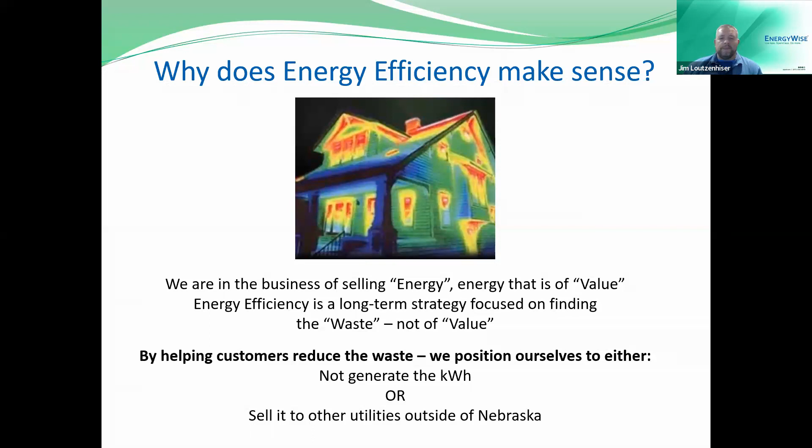In order to know how to be more energy efficient, or what energy efficiency improvements will make the most difference on your utility bill, we must first know where all the energy that you are using in your home is going. Let's look at the typical residential energy use in Nebraska.

You can see that the largest piece of the pie in the chart is heating, which is about 45% of your annual bill. This isn't so surprising since we live predominantly in a cold climate zone for most of the year. Yes, we do get very hot in the summer, and we do have extreme temperatures in the summer, but it's only for a short few months versus the winter, which seems to last forever if you're from Nebraska.

Next, you can see our air conditioning energy, or space cooling, is 9%. If you add both of these up, they total 54%. What that is saying is that about 50% of your annual bill is due to heating and cooling your home. If we can lower the energy used to heat and cool our house, then our bills will naturally be lower.

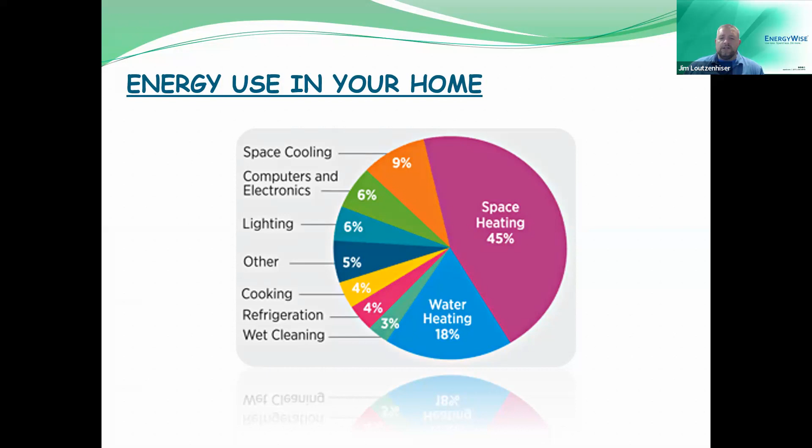Now that we can see where our energy is typically consumed in our house, we need to get to know what other factors can contribute to energy use in your home.

We get many calls complaining that their bills are so much higher than the neighbor's house, and that they have exactly the same style of home. Why is my bill higher than theirs, they ask. Our answer is generally, every home is uniquely designed and operated.

From the actual frame design, or the blueprint design, to the contractors who worked on building your home—many times one house will be built by this contractor, and then the other house is built by this other contractor, and they practice different things, and they actually do different ways of installing insulation, which can change the way that your house operates. Also, the different toys that we have in our home, such as hot tubs, steam rooms, gaming computers, and a lot more—each home's energy consumption is different.

We need to keep that in mind. And the one factor that most people don't consider is that the number of people in the home affects the energy use, and the way they practice energy efficiency can significantly affect the energy use as well. All these factor into your home's energy use and ultimately your monthly utility bill.

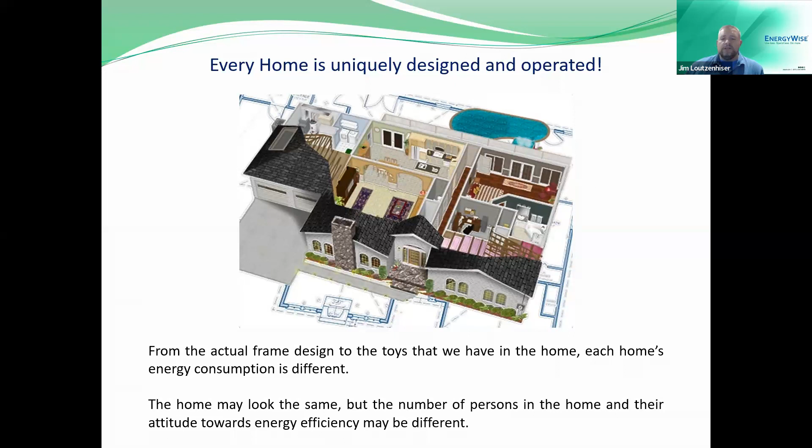All right, now that we know typical energy uses in a typical Nebraska house, and that every house and household is different, we are now going to review smart ways to save on utility bills. And you can see there... stuck here. Okay, here we go.

We are now going to review smart ways to save on utility bills. How best to do this other than the top 10 energy list that we're going to share here. Sorry, the preview came up before, so I got a little lost there. Anyway, back on task here.

Since the largest portion of the pie chart that we looked at before is heating and cooling your home at 50% of your annual bill, generally improving heating and cooling, or HVAC, in your home will be the greatest energy saver and the number one tip for you today.

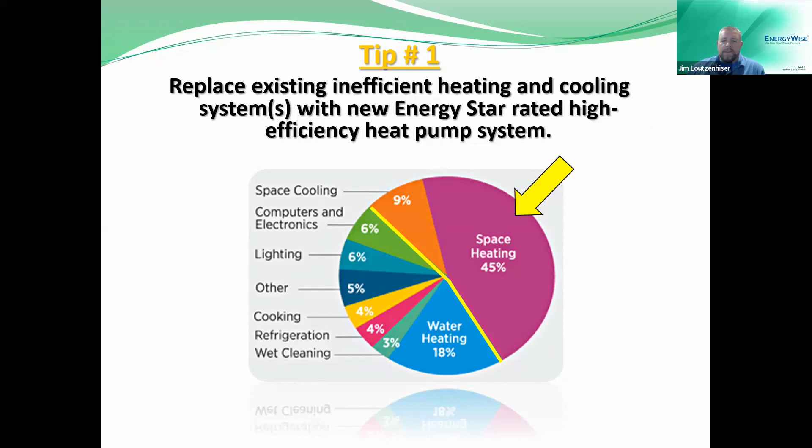So tip number one is replace existing inefficient heating and cooling systems with a new Energy Star rated high efficiency heat pump system. If your heating and cooling system is old, about 15 years and older, and considered to be inefficient, replacing it with a new high efficiency heat pump system makes sense. Let's quickly review how heat pumps save you money.

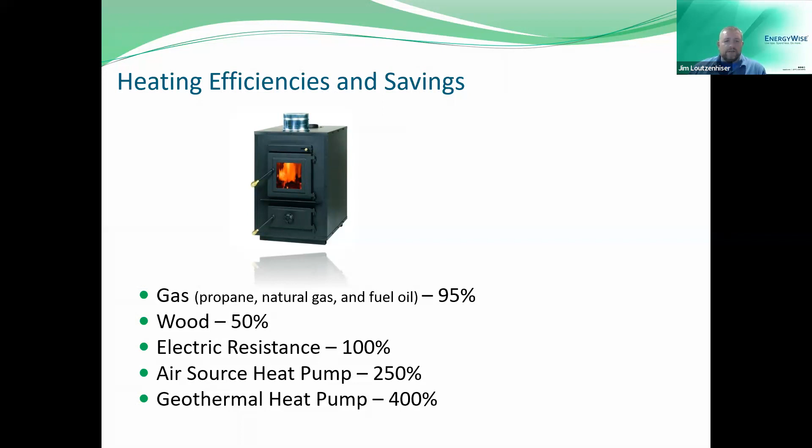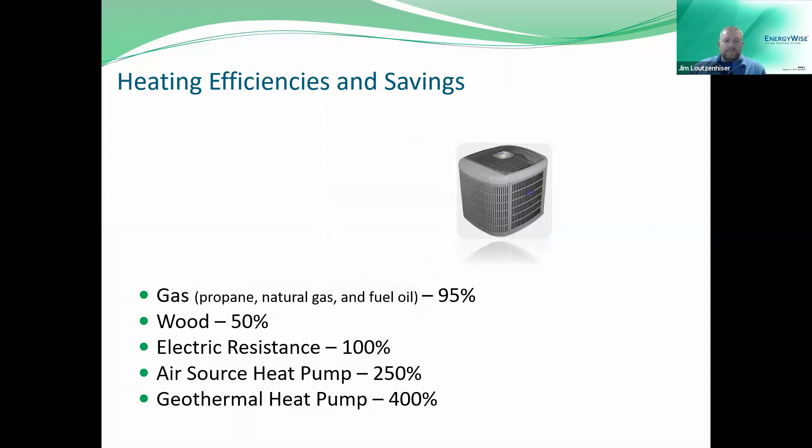In Nebraska, homes are typically heated with the following types of heating systems. The first is gas, usually propane, natural gas, or fuel oil, which is at best 95% efficient. Next is wood. Some people, especially in Nebraska, still like to go out and cut wood, but 50% of their energy goes to heat and the other 50% goes to waste. Next is electric resistance, which is 100% efficient. Then there's heat pump, at 250% efficiency, and last is geothermal heat pump, at 400% efficiency.

And most of you guys are thinking, wait a second, only in football can you go over 150%, right? You can't go over 100%. But typically in football, they always say we're going to go 110 or 150%.

Well anyway, with air source heat pumps you're at 250%, and geothermal you're at 400%. What that means is for every unit of fuel - therms for natural gas, gallons for propane, kilowatt hours for electric - a certain portion of the energy consumed in your home goes to heating, and the rest goes to waste. For wood, 50% of the heat released from burning goes to heating your house, and the other 50% goes up your flue or chimney, so that's wasted energy.

For gas, typically for 1 therm or gallon of propane, 95% of the energy released when you burn propane or natural gas goes to heating your house, and 5% is exhausted or wasted.

Electric resistance furnaces, which have an electric coil, kind of like your space heaters or radiant heaters such as cove heaters, are 100% efficient. That means every kilowatt hour consumed, the energy released when you run that electricity through a coil, goes to heating. None is wasted, so it's 100% efficient.

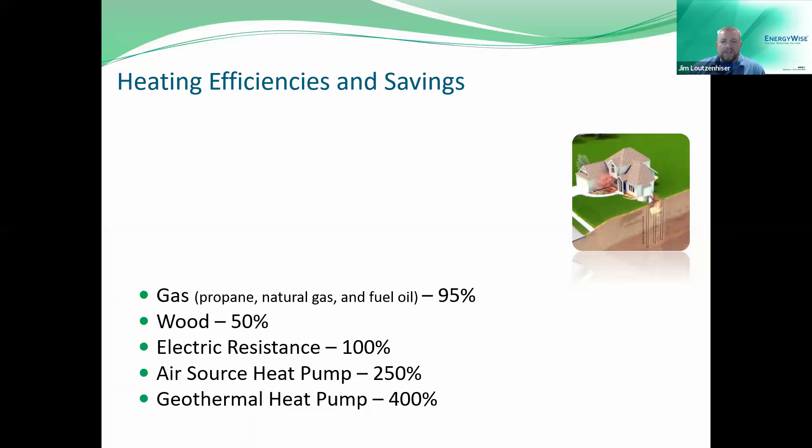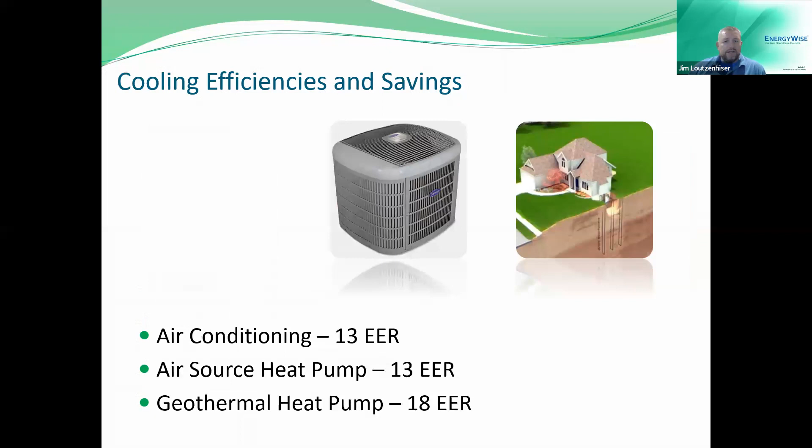Air conditioning and air source heat pumps are located outside and exchange heat with outdoor temperatures. Geothermal heat pumps, on the other hand, exchange heat with underground temperatures and are therefore more efficient. So inherently, air source equipment is less efficient in cooling than geothermal heat pumps.

As you can see, there are ratings: air conditioning at 13 EER, air source heat pump 13 EER, and geothermal heat pump 18 EER. EER stands for energy efficiency ratio.

Let me explain it the best way: the lower the number, the more it's going to cost you, so it's less efficient. If you're buying a car, you're looking at the economy of your car, how many miles per gallon it gets. This is the same thing. The higher the miles per gallon, the further you go, the better, right? Same thing with EER, you want the higher number.

So when a contractor contacts you and says here's a couple systems you can put in for cooling your home, they'll tell you this one is 13 EER, 14 EER, maybe 11 EER. But remember, the higher the number, the more you save. So for cooling efficiencies, you want to make sure you get the higher number for savings.

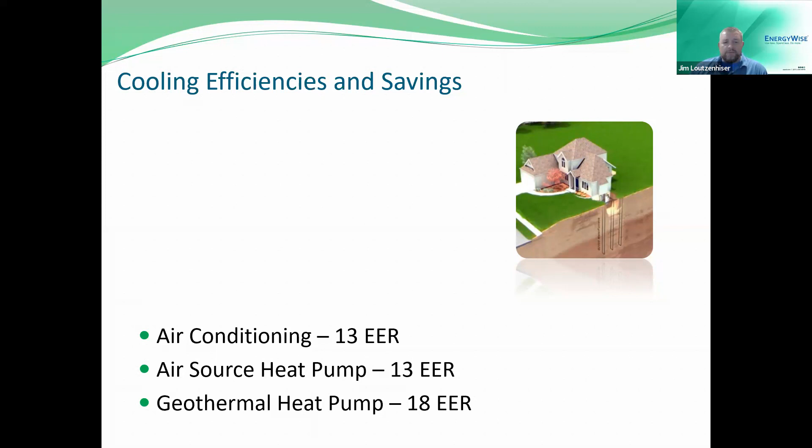Of course, we know that replacing the heating and cooling system is quite expensive. So NPPD helps our customers and wholesale customers by providing an incentive up to $3,300 for upgrading to high efficiency heat pumps. I don't know if any of you have replaced ones lately, but you could see anywhere from $10,000 all the way up to $20-some thousand to put a heating and cooling system in.

Multiple houses have multiple heating and cooling systems, so that could be double, $10,000 to $20,000 to $40,000. That's a pretty significant cost. However, we have to remember, the majority of your annual energy bill is heating and cooling your home, so we want to make sure we pay attention to that. The $3,300 is meant to help offset a portion of the cost to help our customers become more energy efficient in their home.

NPPD's EnergyWise program, such as this high efficiency heat pump program, is for NPPD and wholesale customers only. You would have to contact your local utility to see if they have similar programs if you are not an NPPD customer or one of our wholesale customers. Some of the wholesale customers in our area are Elkhorn, Stanton Public Power, and Southern, and there are many different public powers across the state that participate in these programs.

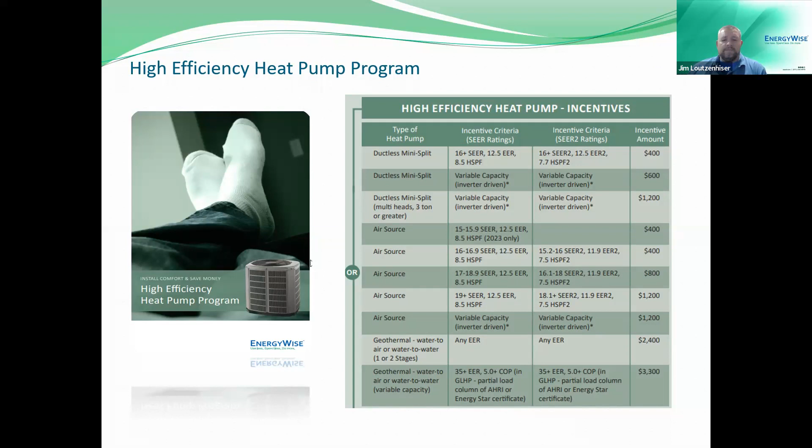NPPD has partnered with the Nebraska Energy Office to provide low-interest loans for those who need financial assistance replacing their heating and cooling systems. The customer can choose the 1.5% interest loan available through the Nebraska Energy Office, or they can get the direct incentive shown before, up to $3,300. Customers can't get both. The 1.5% interest for high efficiency heat pump systems is for homes that are 5 years and older, so if your house is less than 5 years old, you don't qualify for this program.

You could visit their website at neo.ne.gov, click on how to apply, or you can click on download loan form as well. Customers contact one of the 600 plus participating banks across the state, or contact your local bank to see if they participate. If they do not participate, contact the Nebraska Energy Office to find out if you can get that list of the 600 banks that are participating.

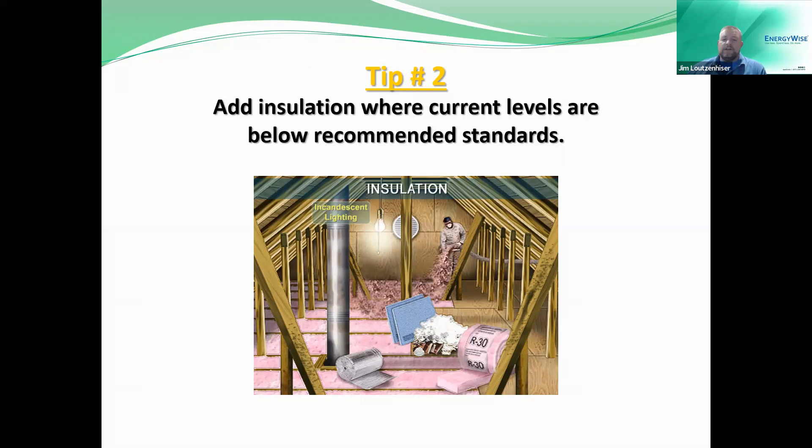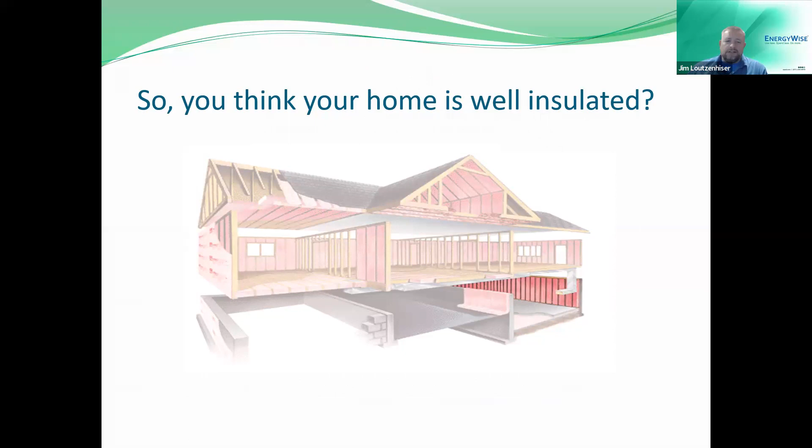So most of you guys probably think your house is well insulated. Think again. Did you know that the average wood frame home that we see in Nebraska has a measured exterior wall R value of only 9.6, and that an average cement block home has a measured exterior wall R value of between 3.6 and 8.6? So you're probably asking, is that bad or is that good? Let's learn a little bit about insulation in your home.

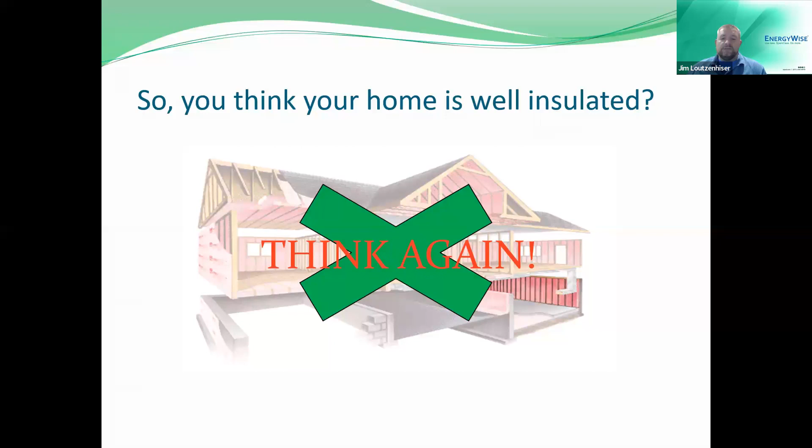Most people understand inches of insulation in their home, or maybe they just know that it's well insulated because it's a new home. But really, how do you know how well insulated your home is? Well, one way is by inspecting and calculating your home's R values. What is an R value, and how do you calculate it? I will try to show you, without all the technical details, what an R value is.

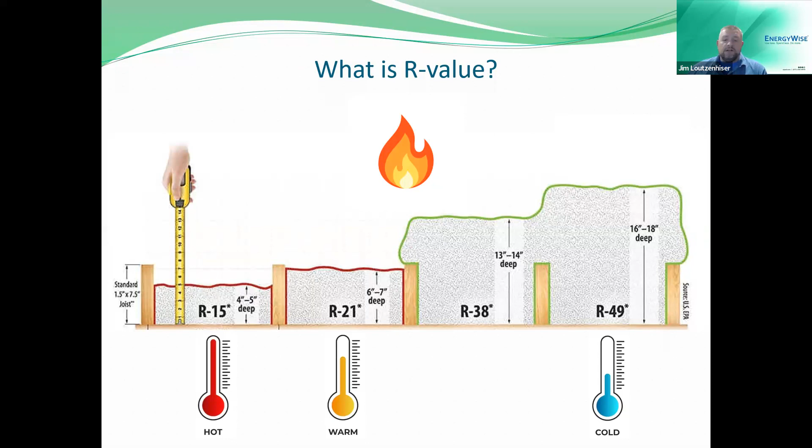How do I know if I have enough R value in your home? The International Energy Conservation Code, adopted by the state of Nebraska, provides minimum R value levels required for our climate zone. The state of Nebraska has published these, and all the builders in our state are supposed to meet these requirements as a minimum. Now at NPPD, when we do an energy audit or look at our values, we typically have our own value that's a little bit higher than these numbers.

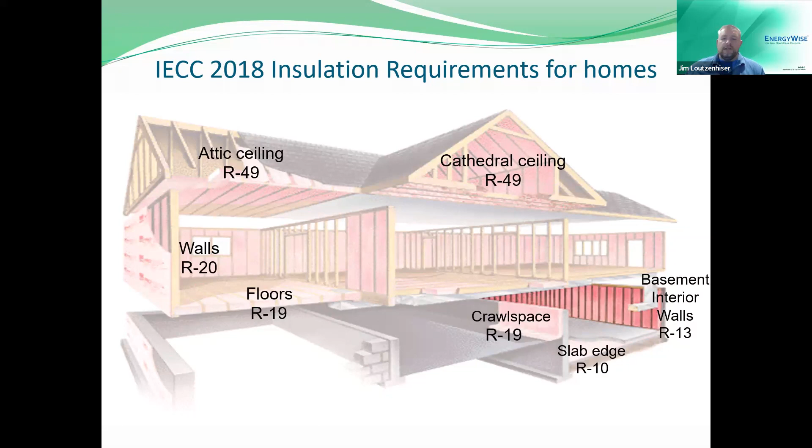To determine your R values, you can inspect the insulation levels in the areas shown, or contact a local home inspector, a contractor, or ask for an energy assessment from one of your utilities. Once you find out if your home is well insulated or needs more insulation, the following NPPD program can help ease the cost of adding insulation to your home.

This is our EnergyWise attic insulation program. A customer of ours can earn up to 15 cents per square foot of attic space insulated, up to a max incentive of $300.

In order for customers to qualify, they must be heated primarily by either electric resistance or a heat pump. Gas customers will not qualify. Another qualification is that the home must have 6 inches of attic insulation or less, and the customer must be adding 6 inches or more to the attic.

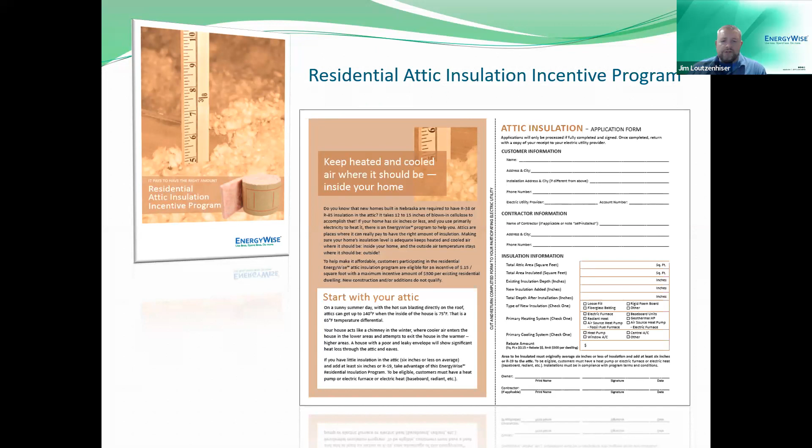The customer can either add the insulation themselves or hire a contractor. Either way, a receipt or invoice for the purchase of the insulation must accompany the completed application shown in the presentation. Again, our program is not designed to pay for the full insulation or installation cost, it's just to help incent people to be more energy smart with their home.

So next, tip number 3. Another way to keep heat out or in your home is to prevent air infiltration by sealing and weather stripping where your house has leaks.

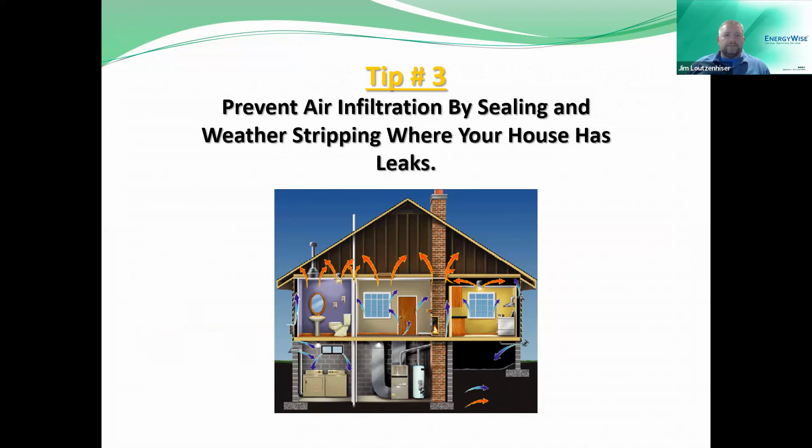Majority of all homes have air leaks, or what we call air infiltration, which can be costly to our customers. Conditioned air, either cool in the summer or warm in the winter, escapes the home through holes located throughout your home, and this drives up your utility bill.

Some sources of air leaks in your home are floors, walls, and ceilings. As you can see, that's 31%, the largest piece of the pie.

Heating and cooling ducts located in the attic or unconditioned basement or crawl space, where the temperature can drop to possibly the outdoor temperature. Up in the attic, if they're not properly insulated, that really cools down the heated air going through, and you can lose air through the joints there. So you could pick up some energy savings by insulating and sealing those too.

Other sources include drop ceilings, water and furnace flues, window frames, recessed lighting, and electrical outlets and switches.

Let's go back to recessed lighting for a second. A lot of people are switching to these new can lights or hockey puck LEDs, which we'll talk more about later. We find them to be very leaky because people don't properly seal around them. So when you're getting them installed, make sure there's a good, tight, airtight fit, and you could also use some gasketing or caulking on them.

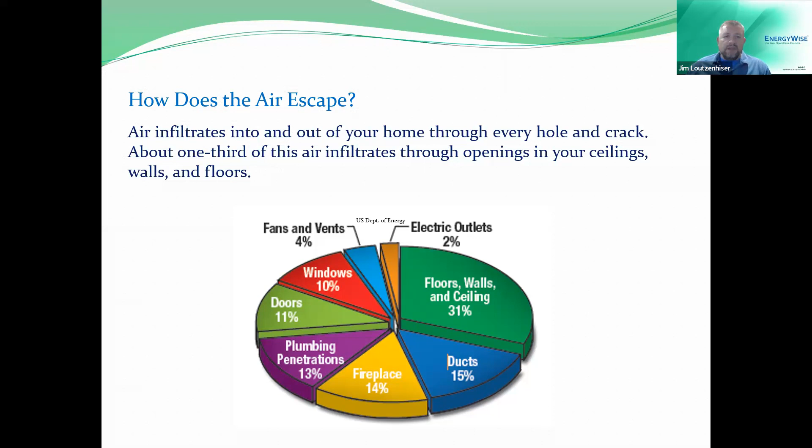Other leak sources include attic entrances, door frames, plumbing and utility accesses, sill plates, and chimney flashing. There's a lot of different things that can leak in your home. One of the quickest dollar-saving tasks you can do is to caulk, seal, and weather strip all seams, cracks, and openings to the outside.

Here's a busy list, and it is very busy, but the reason I put it all in here is so that when you're done with the presentation, you can go back and look at this list, or go back to the recording to get this information. Here's a few tips for you to seal leaks in your home.

One way to tell if you have leaks into your attic is to go up, pull up your insulation, and see if there are any dirty spots underneath it. Most insulation is either pink or white, and when it's black or discolored like that, it means there's air flowing through it.

Another thing is to turn on all your outside ventilation, such as bathroom fans, your dryer, and your stove vents above the cooktop. Turn all that stuff on, and that will create a negative pressure in your house. Then you can go around with a smoke pencil or incense and put it around the frames of doors and windows, and you'll see it blowing, which provides a bit of pressure in your house and helps you find those air leaks.

Some of you guys might already know you have air leaks because you sit next to that window, and when it's blowing outside, you get really, really cold. So there's a few things there on how to find your leaks and how to seal your home.

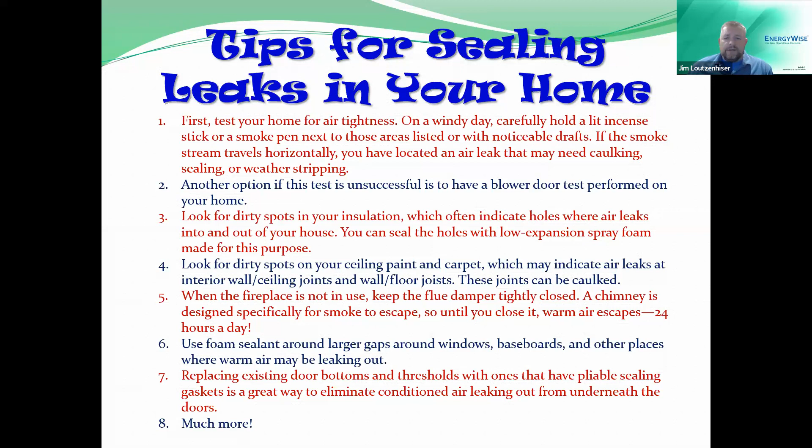Next, I want to talk about Nebraska Energy Office's Weatherization, Low-Income Weatherization Assistance Program. This is a program for those that have low income, some of whom can't afford to make their house more efficient. So what you do is contact the Nebraska Energy Office or visit their website and sign up for the weatherization program. There's a link on there, just below the link we had for the low interest loans. You can apply for it.

Some of you guys might think, hey, I'm not low income, I make a pretty decent salary. But believe it or not, it's based upon how many people are within the home, how many kids you have. So you could be making a pretty good amount of money and have 4 or 5 kids and still qualify. Also, if you are low income and do definitely need help, they will bring people in to do a quick energy assessment of your building or home, and find the most effective things that need to be improved that will save you the most energy, and they'll replace it for free. There are some really cool things within this program.

Make sure you go to their website and look at the details. It's not administered by us, but we like to let our customers know it's available.

Tip number 4, keep your heating and cooling system clean and replace dirty filters. We recommend replacing your air filter every 30 to 60 days or as necessary. The reason I say as necessary is because sometimes you can pull it after 60 days and see really clearly through your filter. It's not dirty, so you might want to just time it.

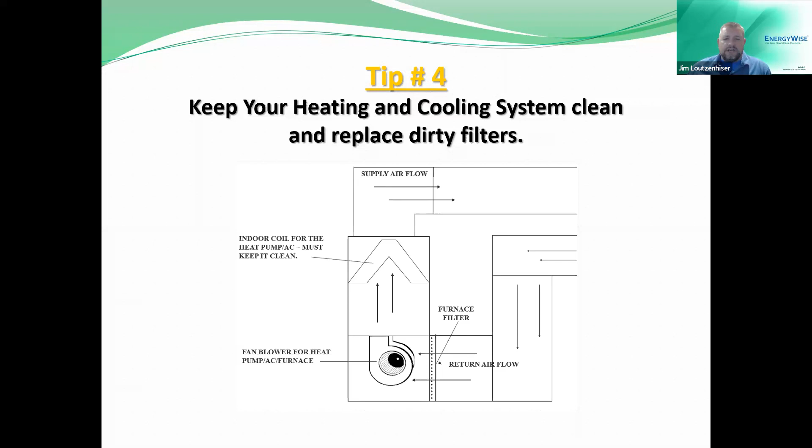So guess what? NPPD has a program that helps keep your system running efficiently. NPPD's cooling system tune-up program helps our customers tune up or service the air conditioner or heat pump before each cooling season. The outdoor cooling coils that you see outside with the fan get dirty from the cotton in the fall, from dirt blown around during the winter, or the dirt that settles as the snow melts.

The indoor coil, which I showed you before as the V shape, gets dirty sometimes during the winter or when the filter isn't properly filtering out all the dust. That gets clogged, and servicing by your contractor will help clean both the indoor and outdoor cooling coils and help that run as efficiently as possible.

Servicing your system once a year, or what we recommend every 3 years, helps your system run as efficiently as possible. The incentive here is for residential customers only, not commercial, and we pay $30 per tune-up. Eligible systems are air conditioners and heat pumps. The $30 helps incent people to maintain their system, though it doesn't pay the full cost. We try to shoot for about half the cost, but sometimes it's only a third. We're doing our best to help our customers be as efficient as possible.

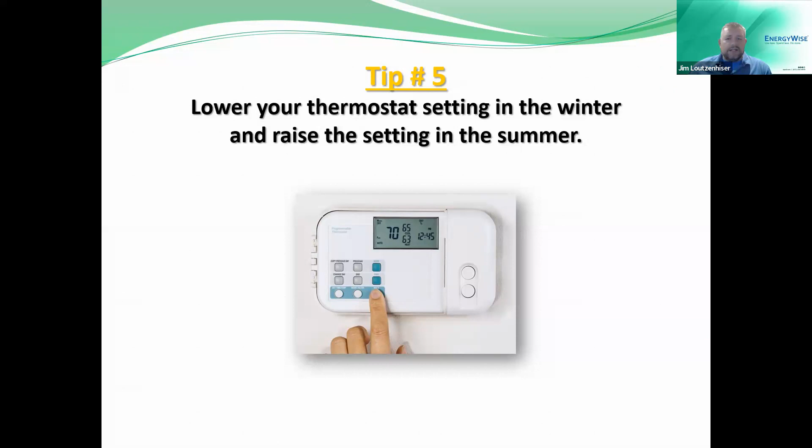Utilizing the setback thermostat feature when you are away for the day or the weekend will save you money. Another thing is to install a smart thermostat. Smart thermostats are said to save you up to 8% off of your heating and cooling bill.

NPPD's EnergyWise Smart Thermostat program helps our customers partially offset the cost of purchasing a smart thermostat. Electric heated homes, either resistance heat or heat pumps, can receive an incentive up to $100. For gas customers, up to $50. In order to qualify, customers must meet all the program guidelines, fill out the application form, and submit it with a receipt for the purchase. Thermostats that qualify can be found on the Energy Star website, energystar.gov, or by visiting our link listed on nppd.com.

The easiest way to save on hot water is to use less of it — installing things such as low flow shower heads, sink aerators, washing full loads of laundry or dishes, and machine washing with cold water only. Remember, Stone Cold Steve Austin is on TV telling everyone to wash in cold water, so it'd be best if we listen to him — it will save you money.

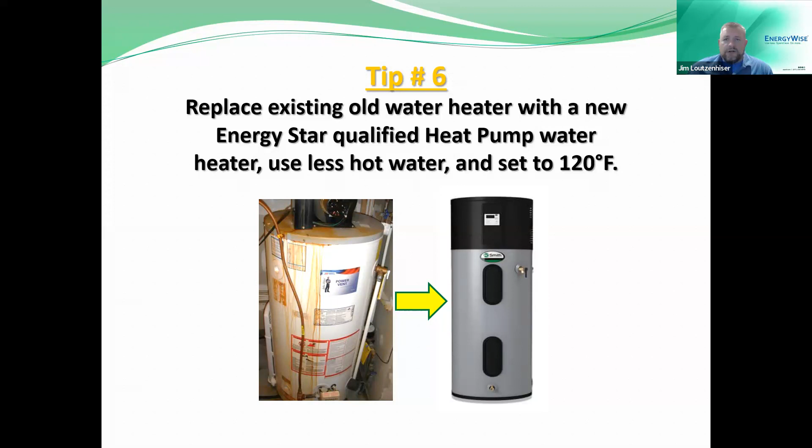Our incentives are up to $500 for heat pump water heaters. We have an Energy-Wise program for that as well, which helps with a portion of the cost. Customers can get up to $500, but the most common incentive is the $200 one for an air source heat pump. Customers also have the option to apply for a Nebraska Energy Office loan, and you can visit their website for more details.

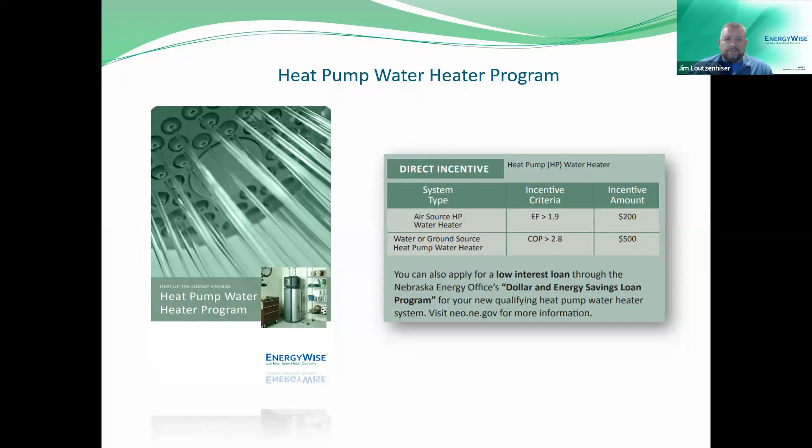Next, tip number 7 is to replace outdated appliances with Energy Star appliances.

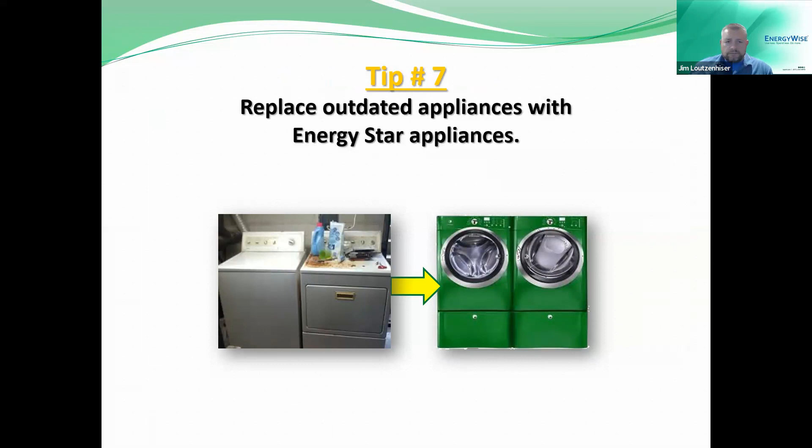Appliances manufactured today are typically much more efficient. As appliances age, their efficiency decreases. Knowing the age and life expectancy of your electric appliances can help you understand your electrical use in your home. If your appliances are at or nearing end of life, you may plan ahead.

When replacing old appliances, pay particular attention to energy efficiency. In most cases, the energy efficient choice will save you money. So what do I buy, and how can I tell if the appliance is energy efficient?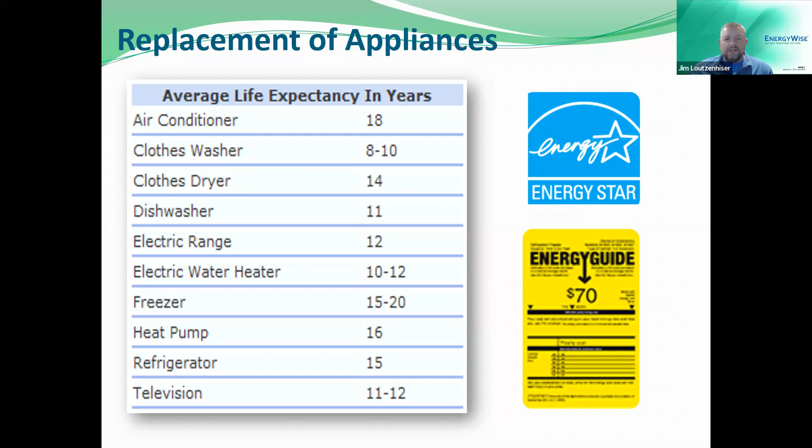Most people wait until the appliance breaks down, and then they're in a rush to get it replaced, and they're going to buy whatever's available, sometimes at a higher cost. You can see there too, a heat pump's about 16 years, your refrigerator's 15. I know some people have those gold and avocado refrigerators out there still running from the 70s. So when it gets past those times, they may be still running, but the problem is the efficiency is no longer as good as it was when it was brand new.

So here's one tip you can do on saving on heating and cooling. Reduce your temperature at night. Like I said, those setback temperatures with your thermostat, turn it down a couple of degrees, which means the house gets a little bit cooler during the winter, but throw that electric blanket on. You're going to save more energy by doing that.

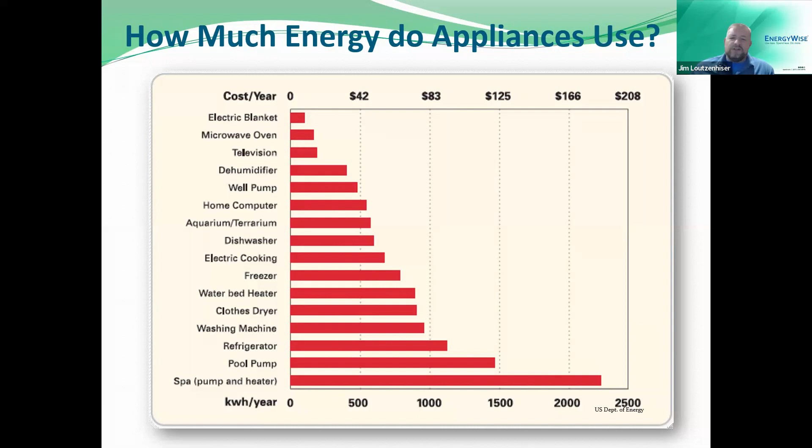Next we're going to talk about NPPD's Energy-Wise induction cooking program, which helps customers upgrade from a gas cooktop or a standard electric range to a more efficient cooktop, which directly heats the food through the method of induction heating, versus heating the whole cooktop and all the air around it.

This program provides an incentive of 20% of the purchase price. Customers should be able to access this program online and review the program guidelines for details to see how they can qualify. So 20% of the purchase price, that does not include installation, taxes, and such. And there's a 30-inch minimum width on this, so make sure you look at the program guidelines.

Another way you can reduce heat gain in the summer in your house from your cooktop is by cooking not with your cooktop or stove, but using the microwave to cook, cooking outdoors on your grill, or when you do have to cook inside, like the picture shows you there, make sure you have your lid on there. Not only does it help you get to a boiling point on water when you're cooking with water, but it also keeps that hot, moist air from entering the air and the heat being released from that pot.

Tip number 8, we're coming down to the end. Tip number 8 is use Energy Star qualified LEDs in place of inefficient lighting in your home.

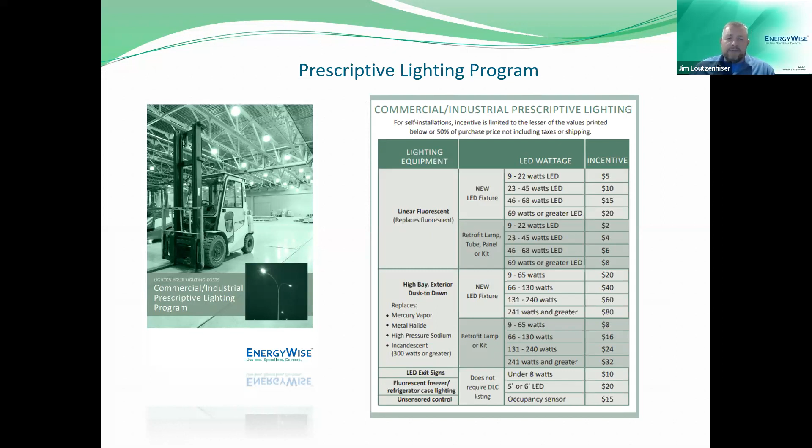The next tip, not the last, but tip number 9, is to replace old single pane leaky windows and uninsulated leaky doors with new Energy Star windows and doors. Windows can account for 10 to 25% of your home's heating bill, especially in colder climates like ours. If you have an older home, you may have inefficient single pane, leaky glass windows, and leaky doors.

If you do, you may consider replacing them with a good quality double pane, low E window and/or polyinsulated door. What low E stands for is basically a film or design of the window that reflects the heat from coming in from the sun and back out. So when the sun rays hit the windows, it bounces off and goes back outside and does not come in. So a low E window is a rating you can get. Double pane means there's 2 pieces of glass with typically a gas such as argon, which is an insulating gas.

Other windows that are more efficient are casement windows, the crank out windows. Those are more efficient because when the window closes, it pushes against the seal, versus slider windows, which have kind of a brush-like seal that can be very leaky sometimes. So the most efficient windows out there are typically crank-out ones, but not always the case. Sliding windows are getting better and better.

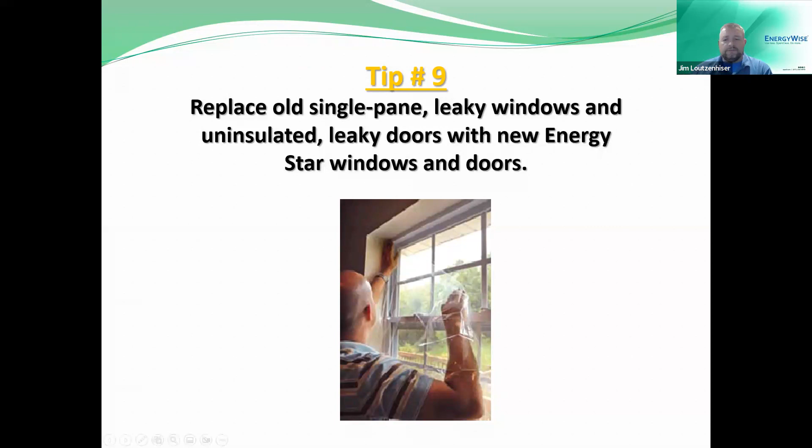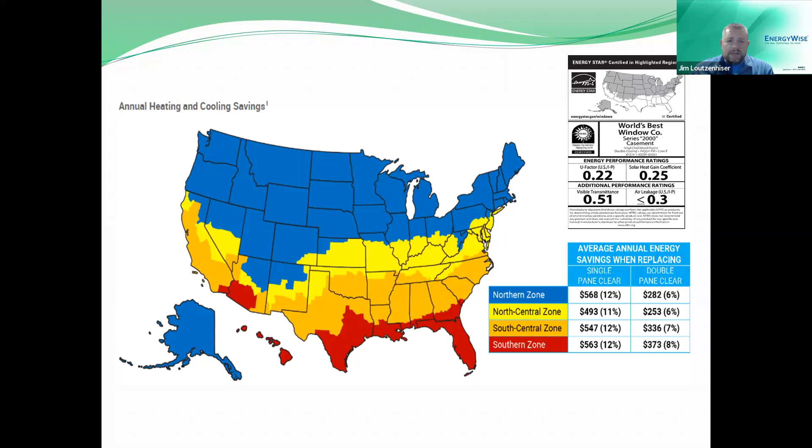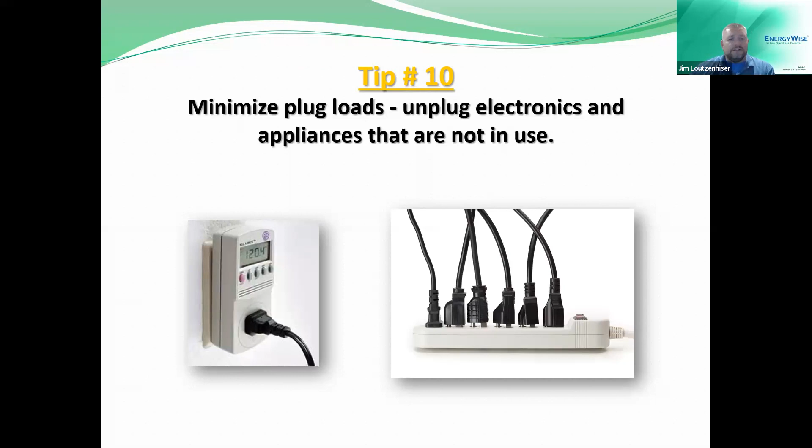The last tip is to minimize plug loads—unplug electronics and appliances that are not in use. That meter you see is a Kill A Watt meter, which you can buy at a local hardware store. If you want to know how much an appliance is using, plug it into the meter and it'll tell you how much energy is actually being used. Make sure you turn off your appliances when not in use.

All right, that's our top 10 list of how to save energy. Next, let's look at our last residential NPPD incentive program.

We have a lawn and garden incentive program, which gives you 20% off any electric chainsaw, tiller, snow blower, or lawnmower, and it lowers energy costs by switching to electric. You can cut operation costs to approximately half of the gas-powered option. There's less maintenance, and it's quieter and more eco-friendly. So if that's what you're looking for, you could do that.

We also have an electric vehicle incentive program—we pay you $500 for a charging station. We know electric vehicles are coming; some people disagree on how fast or slow it's happening, but we offer $500 for a charging station incentive and $400 to pre-wire your house, or 100% of the cost up to $600 for wiring. If you want more details, go to our website and look at the program guidelines to see how you can qualify.